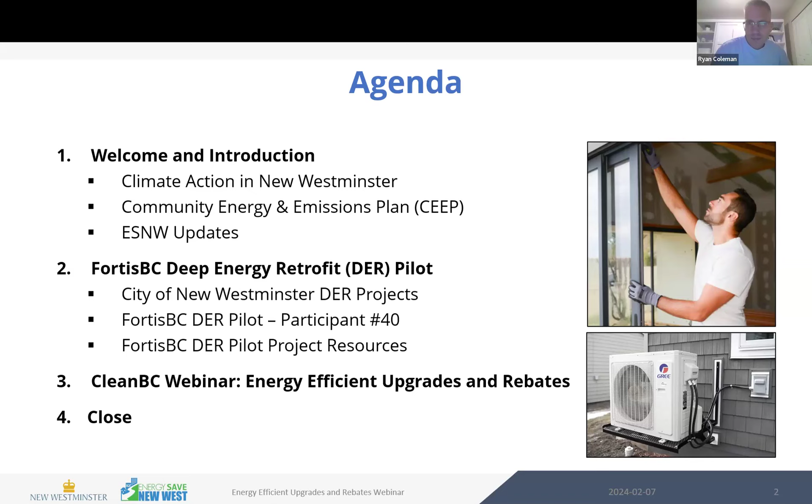I can present, Sue, if you want. Yep, okay, go ahead, go ahead, Leya.

Sure. So as I started getting into during my own introduction, the climate action team was really formed after the city declared the climate emergency in 2019. That climate emergency was the city recognizing our role in the fight against climate change. From that, the city developed the 7 bold steps for climate action.

The goal around that was to make the climate work a little more tangible and relatable to the community. Using these bold steps, if we're able to realize a carbon-free corporation, a car-light community, et cetera, by doing that we will inherently create a much nicer place to live, but also work our way towards a zero carbon future. So it was a more tangible way of understanding the types of things we might do that make up that zero carbon future for our city.

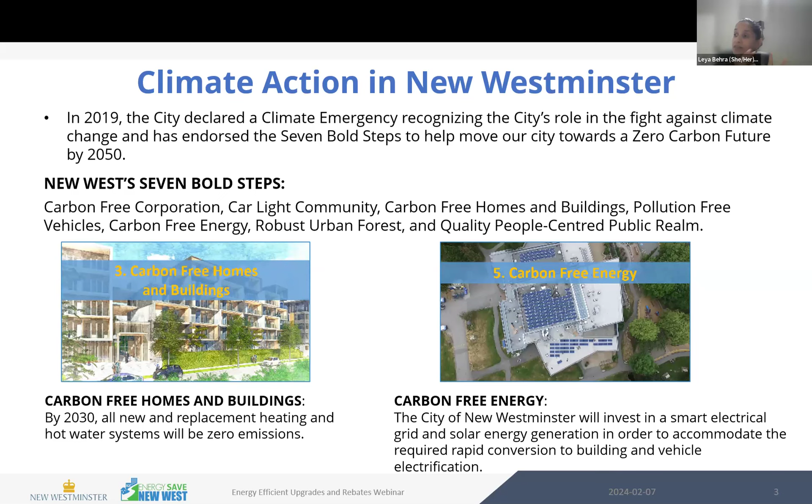What's really relevant in this conversation is bold step number 3, carbon-free homes and buildings. We have a few goals there, including by 2030 that all new and replacement heating and hot water systems are zero emissions. We also recognize the city has an electric utility, which is pretty unique and a great opportunity for us - a place where we can continue to secure and deliver carbon-free energy to the city, upgrading our electrical grids to be smarter, looking at generation opportunities, and requiring rapid conversion to building and vehicle electrification. All of those things we do with our electric utility help enable all the other climate work we're doing.

Another focus that might be of great relevance to our community members sitting with us today is the Community Energy and Emissions Plan. This is a document that outlines the big picture - the types of actions we need to take as a city, both directed by city staff, but also in collaboration with all of our residents, to meet our emission targets.

That plan is available through the city's website, and it's broken out into sections to make it easier to read, covering transportation, buildings, energy, waste and circular economy, and natural systems. It shows how the climate work fits into all aspects of how departments within the city deliver their work, and also how it relates to supporting our community in reaching our zero emissions goals.

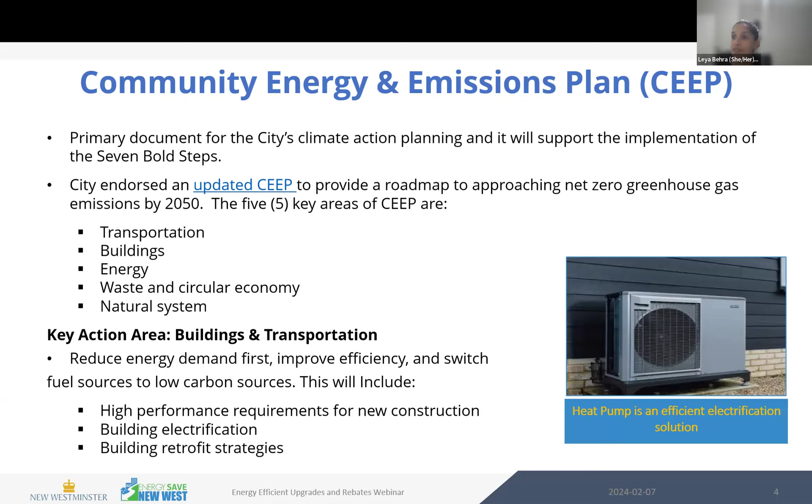Nice. So I think with that, I'll pass it back along to. Perfect. Thank you, Ryan. Thank you, Leya.

So Energy Save New West is really one of the on-the-ground dimensions to the efforts of the city and Leya and her team. We wanted to give a couple quick programmatic updates that we thought would be relevant to today's subject matter and folks doing this type of work in New West.

The first one is around our infographic. We publish it on an annual basis, showing the work we're doing and our results in the field. That is available now as a blog post on our website, and you can download a PDF version.

Second, we've done a couple webinars now, as well as some industry engagement around heat pumps, electrification, and decarbonization. Although that's not the focus of tonight's webinar necessarily, we are coming out with a few new supporting tools, specifically around a noise guide for bylaw compliance and mitigation to manage that. We also have some case studies we've been developing, harnessing some of the learning and sharing from local homeowners, as well as their experience with contractors and the equipment, that we're hoping to publish and make available.

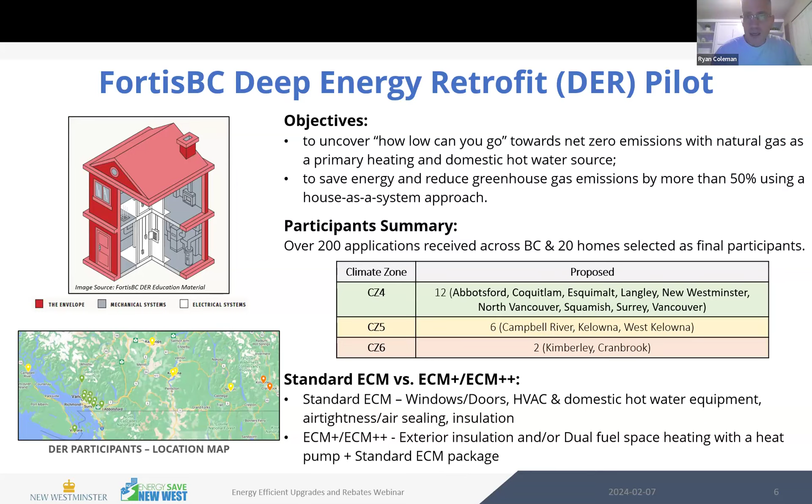Now if you jump to the next slide, this is Jonathan's house. Unfortunately he's not with us, but we do have Bo, and we've got Bo's slide coming in a second. Jonathan has an older 1940s house, about 2,500 to 2,600 square feet. The work needed was a combination of envelope and mechanical systems.

We've done attic and basement insulation upgrades, as well as significant air sealing. All of his windows were replaced and upgraded to triple-glazed high performance windows, along with high performance doors. We also moved from exhaust-only ventilation, which all the houses had, to an HRV system, since we were lowering air tightness and ventilation is a key component. New HRVs were installed in each of these houses, along with a high efficiency furnace upgrade and a tankless hot water system.

I think the key focus we want to draw your attention to is the estimated energy and greenhouse gas emission savings: a 56% energy reduction, from 171 gigajoules to 76 gigajoules, and a 64% reduction in greenhouse gas emissions, from 7.5 tons down to 2.7 tons.

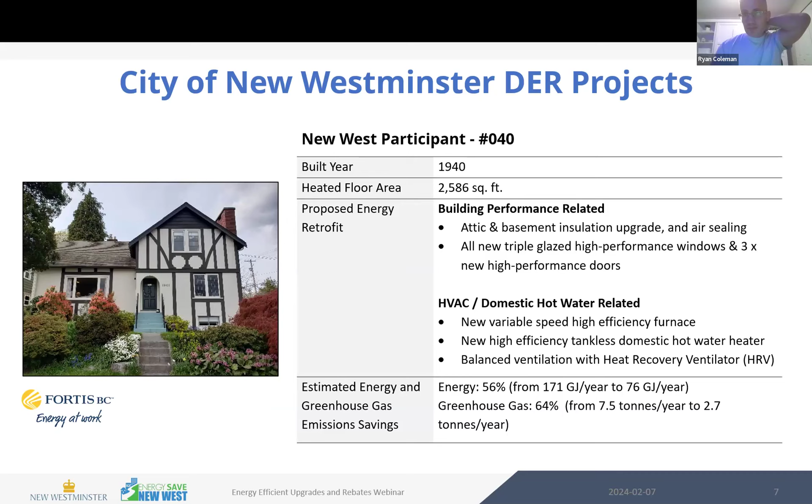And then Bo's house—Bo, if you want to pipe in after I introduce, because we go back to Jonathan's place, feel free. If not, that's totally fine as well. So Bo also lives in New Westminster, and she has a 1964 house, 2,200 square feet.

Again, she had a conventional package, but received all new attic insulation, air sealing, triple glazed windows, high performance doors, and a similar mechanical package with a high efficiency furnace, tankless hot water, and HRV. Similar significance in terms of GHG and GJ reductions of 58 and 69%.

I don't know if you wanted to comment, Bo. I know you've been quite enthusiastic about the work that's been done on your house, which is great—that's where we want to get to.

Yes, I am super excited about what you've done to this house. I just applied because I read it in the Energy Save New West, and I didn't really think I stood a chance of getting this, but I applied, and I'm so glad I did, because the comfort level is beyond my wildest dreams. It was so cold and drafty and moist in here, and the comfort is unbelievable with the triple glazed windows especially, and the insulation is coming along, almost done. Everything's almost done now. And the environmental thing was really important to me. I sit on the district climate action committee, and I felt really bad that I was burning so much in this old house. So what they've been able to do is just absolutely—I'm so incredibly grateful. And it saves me money, it improves my home, the value of my home too. I just can't recommend it enough to anybody. I'm just thrilled to bits.

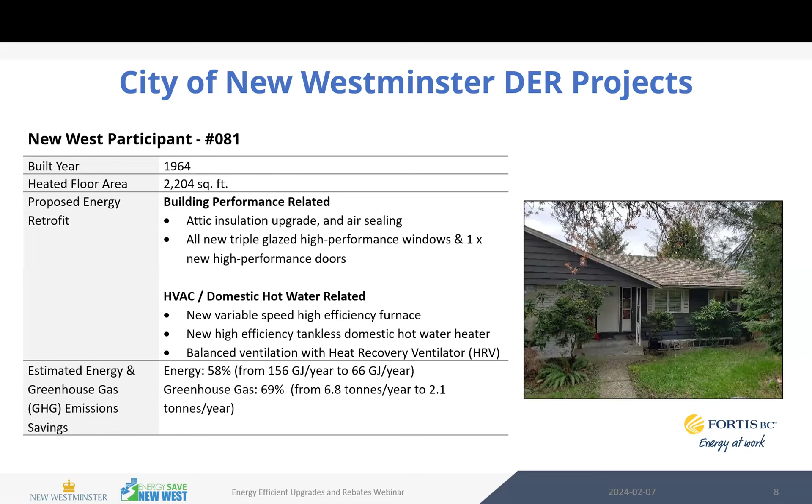Number one, this house is getting significantly more airtight through detailed insulation and air sealing upgrades—going from approximately 10.5 air changes down to 2.5 air changes per hour. All of that was a lot of heat loss. So we're significantly improving the structure and building envelope, which has allowed us to drastically downsize the actual equipment going into the house.

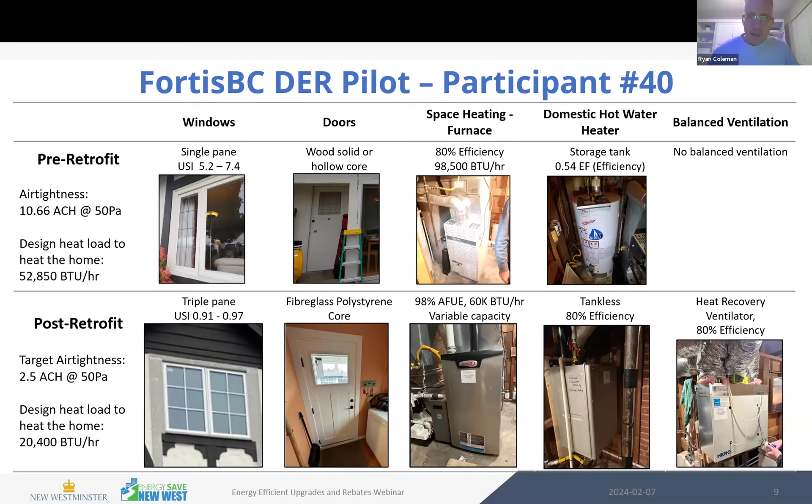But to tie this all up and move towards the Clean BC folks, this is really about that envelope-based approach. When you improve your envelope—insulation, air sealing—ahead of doing your mechanical systems and sequence it properly, you achieve added benefits of smaller equipment, less heat loss in your home, improved comfort, and other benefits like health and indoor air quality, especially when putting in HRVs and balanced ventilation. Yeah, and that's just a before and after picture.

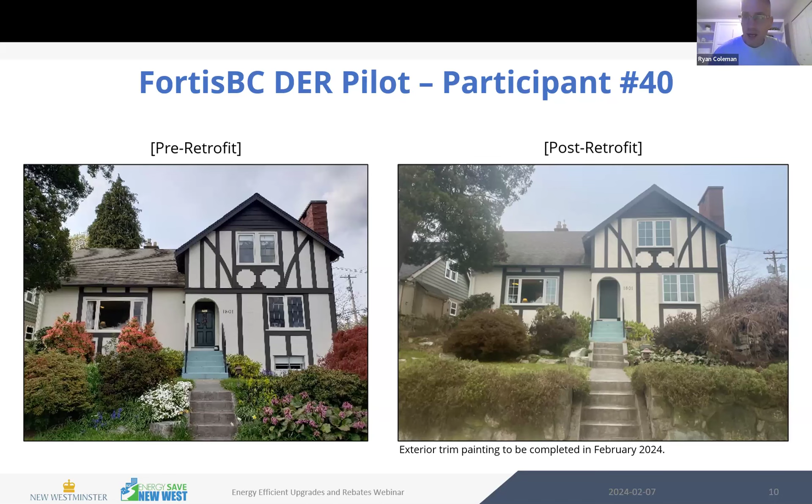As highlighted, some of the finishing is still yet to be done on these houses. They're all due to be fully completed with post-energy evaluations, heading into a year of measurement and verification at the end of March. That's one of the cool things I didn't mention in the pilot beforehand—we're talking about modeled information right now, but embedded in this project is a year of measurement and verification to see how these houses actually perform when occupied and run under regular operating conditions with the actual occupants. It'll be great to see those results shared over the next year. But they're all getting a year of measurement and verification.

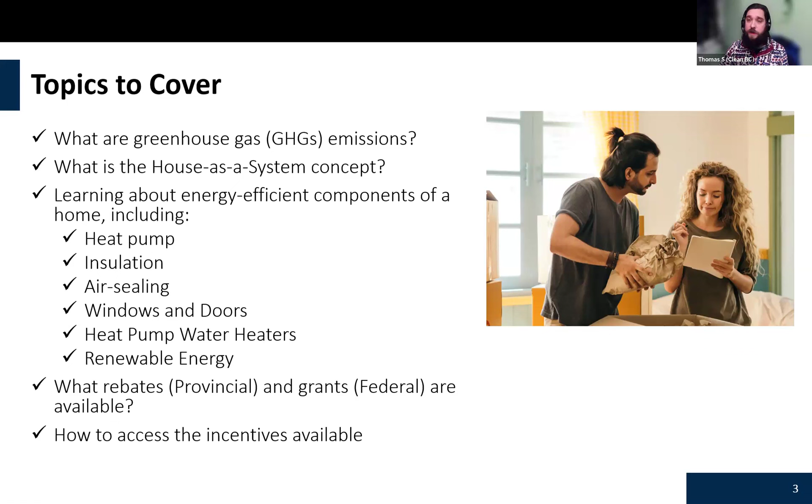First, I want to overview what greenhouse gases are, because they're typically thrown around a lot. Greenhouse gases are made up of many different types of gases: carbon dioxide, methane, nitrous oxide. Typically we're mostly concerned with CO2 and methane as the main things we deal with.

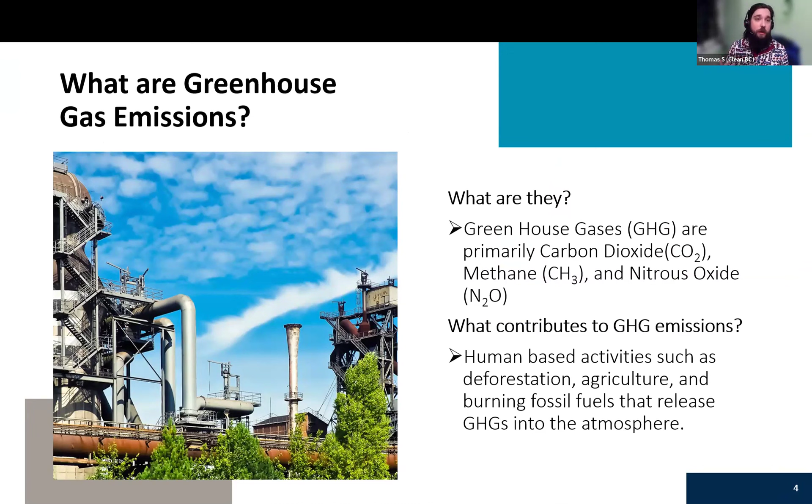What typically contributes to these GHG emissions is an encompassing thing - human-based activities, deforestation, agriculture, burning fossil fuels - those all release GHGs into our atmosphere and modify and change it as it goes. Our homes are definitely one of the major things we need to be concerned about, and the emission sources that we use.

Higher efficiency furnaces and high efficiency heat pumps are always going to be beneficial at reducing the overall amount of emissions you're giving off, and having that upgraded house. Houses heated by gas produce about 50 GHG on average - that's about 2 barbecue propane tanks if you want to put it into perspective. Metro Vancouver typically has the highest amount of GHG burning, but most other communities are typically similar, with natural gas being their main source of heating.

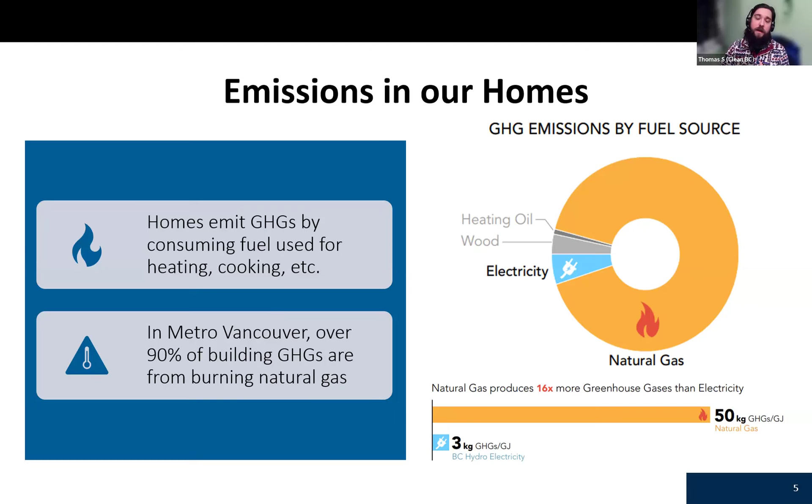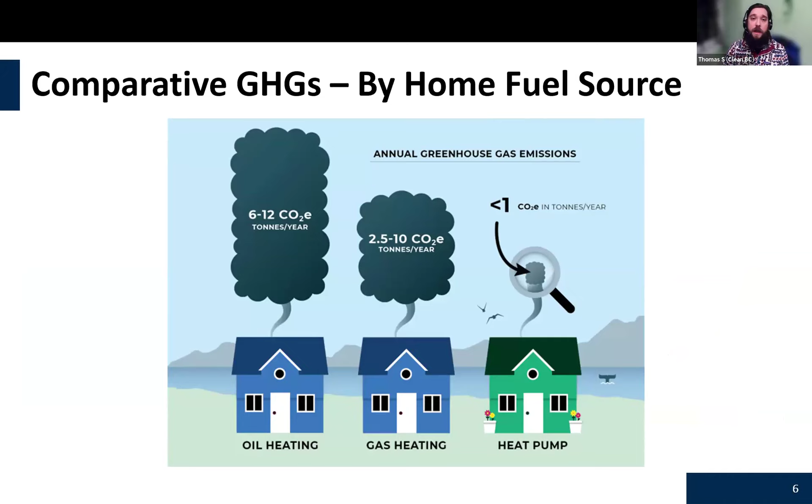This photo references the different amounts of GHG across all the different types, with oil heating being the worst, but we typically don't see that as prevalent over here on the West Coast. As you can see, heat pumps do produce some GHG, but they're typically very minimal and don't produce as much as you'd think.

Overall, I want to also note that BC has 98% of its electricity generated by hydropower. We generate about 702 megawatts of wind power and about 303 megawatts of solar power, so it accounts for a lot of our overall clean energy that we perform.

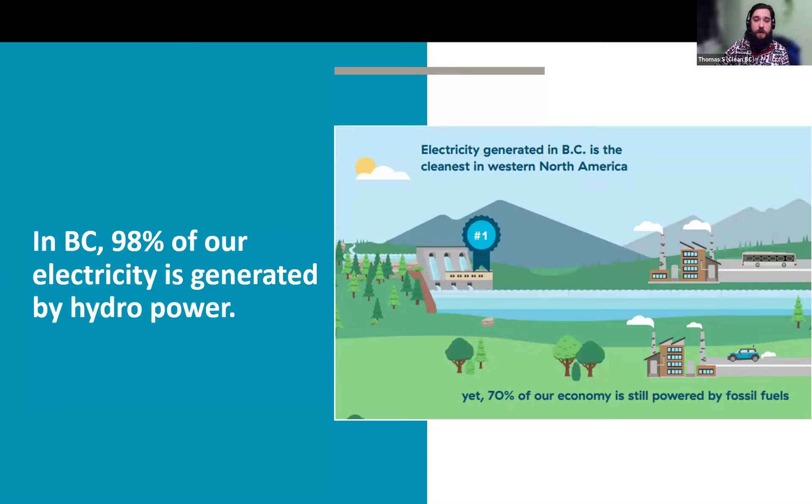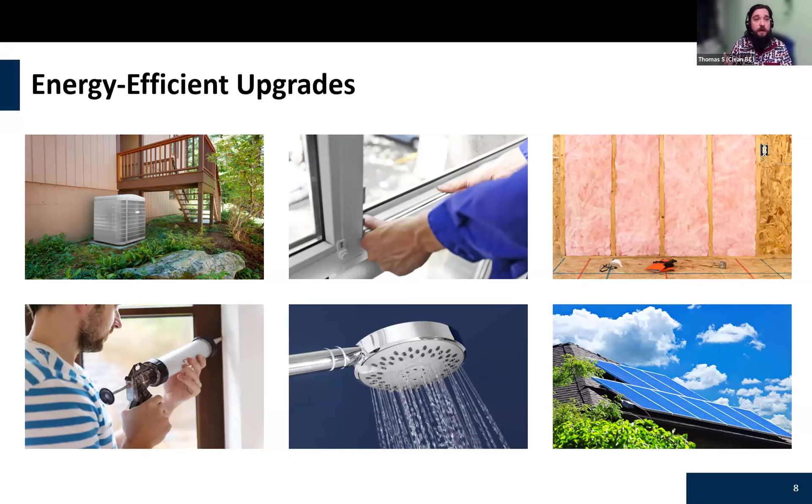Before we get there, Ryan has already talked about this, but this is the house-as-a-system concept - looking at the house as a whole. Everything you approach has an effect in the end. So if you add more insulation and air sealing, you definitely have to watch out for your ventilation. Those are some examples of what we're looking to talk about.

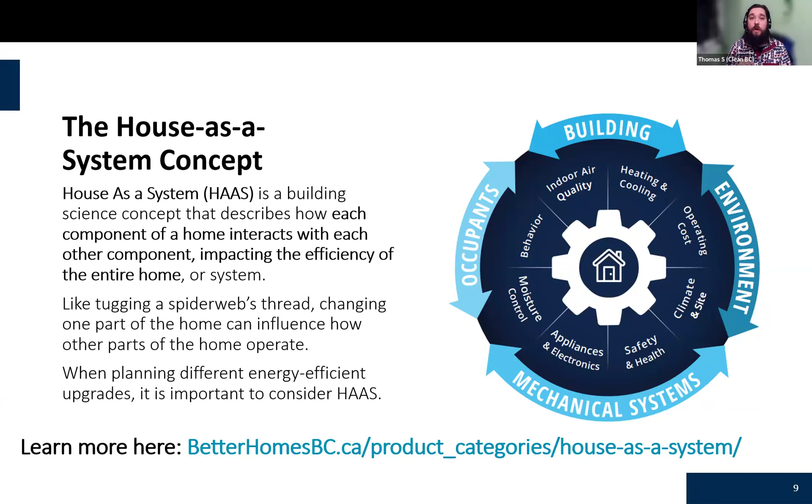Each item has a spider web and has a connection that we have to always think about. Some examples we're going to talk about are air leakage issues. If you seal them up too much, you also need to move some of that air and moisture outside.

So things like your heat pump, our different types of HRVs that we have seen, those will be effective ways at removing those kind of stale and dirty airs. What are the benefits? You'll be able to have a smaller size system, as we have stated before, more efficient heating and cooling, and then also your temperatures inside of your house will stay more consistent, as Bo has actually noted there.

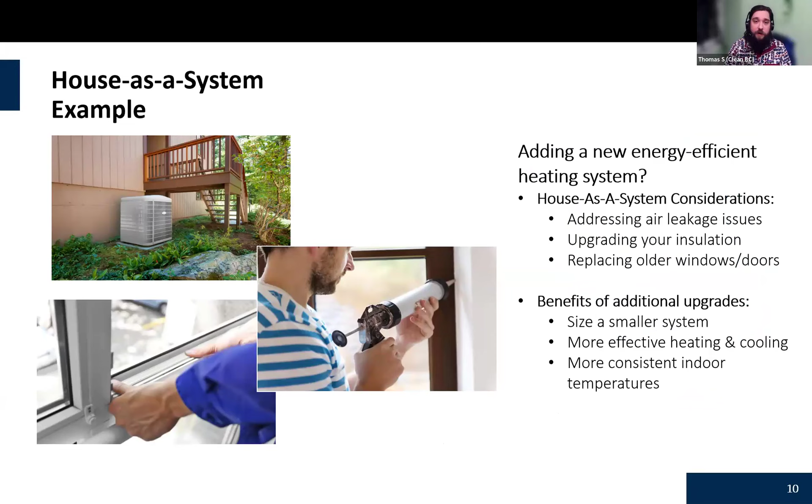Home evaluations are something that are very beneficial and very helpful for you to understand what upgrades are going to be needed for your house. They are comprehensive, unbiased. The energy advisor will always give you what is real in your house, what is going on, and what you need to do to take your next steps.

It will always help you find the solutions that you want to do for your house, making sure that you got the best options for yourself as well, and then guide you as much as they can towards different rebates and grants.

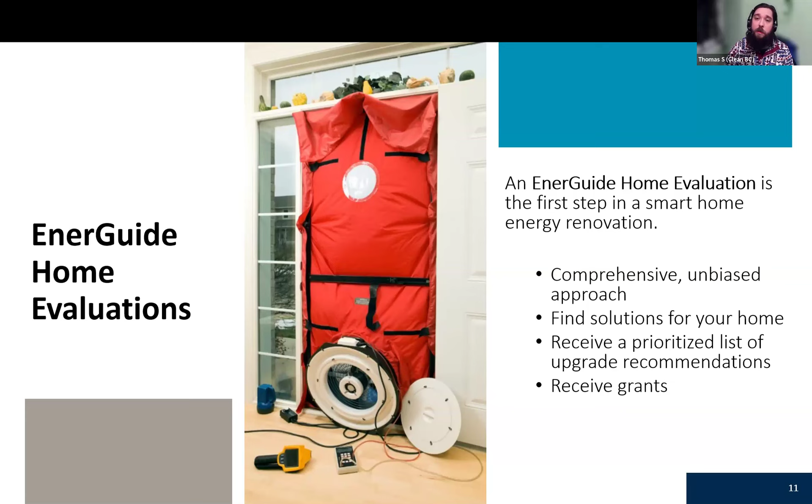All should typically complete a blower door test. In some conditions, there are reasons that they do not complete it, for health reasons, but it is typically needed to always do a blower door test when they do these evaluations.

We are going to brush over two key incentive programs. First will be the provincial system, which will be through Clean BC. That will be typically about over $13,000 in rebates in total. You have municipal top-up programs and regional programs such as Energy Save New West that will have the ability to offer different programs that will be able to help you as well. The other one is going to be the federal program, which is the $5,000 grant, the $40,000 interest-free loan for 10 years, and then the $10,000 oil to heat pump affordability program.

First, I will just quickly go over the income qualified programs and the different Clean BC programs that they have. Clean BC has, like I said, over $13,000 — it's about $14,500 total — that is how much they have available for rebates that you can get to your house. They also have the income qualified program, so if you are of lower income, you can access grants and things like that at a higher amount of money given back as a rebate. They also have a low interest finance program and different types of new construction programs as well.

The Greener Homes Initiative is a little bit different. For most of the program, you need to get an energy evaluation to take part in any part of the program, except for the oil to heat pump affordability program. You do not need an EnerGuide evaluation for that one, you just need to apply on the site for the application.

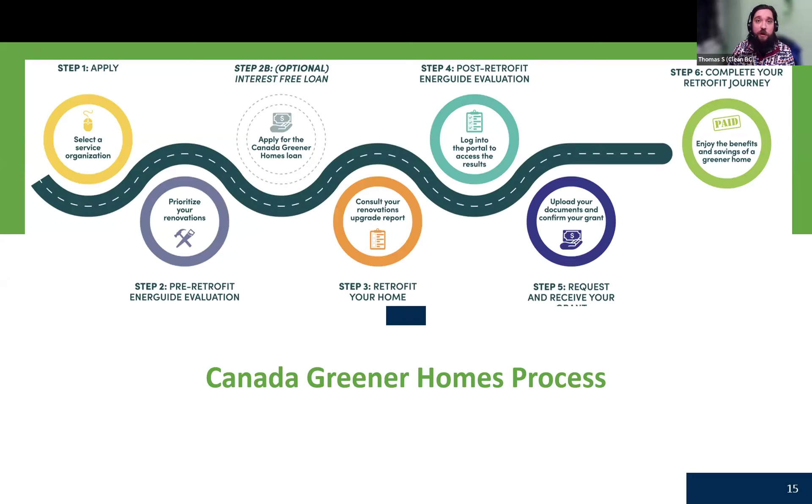This is the general process of the Canada Greener Homes Grant process and also the loan process as well. Both will follow very similar processes: you need to get an EnerGuide evaluation, get that report, typically check what upgrades are best for your house, and talk to your energy advisor if you have questions. Then apply those upgrades, apply for the loan beforehand if you are going to do that, and move towards doing all those retrofits, finishing off the application and getting your post-retrofit evaluation. After you're done all of those items, you could always ask the Canada Greener Homes Grant Program for any extra help along that process.

Next, we will be talking about the different types of upgrades in your house, what those are and what those entail, and give you ideas of what to do.

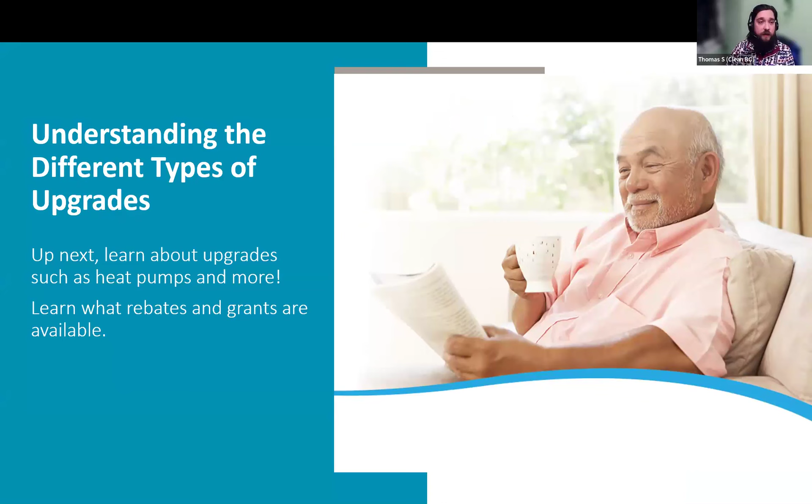First, I want to talk about the heat pump itself. Heat pumps are always talked about, and getting an idea of what they do is a very big first step. Heat pumps use electricity to heat through your house. They do this by transferring the heat from the outside to the inside via coolants in the refrigerant lines. They are typically about 3 to 4 times more efficient than most energy electric-based heating systems, and are very good for your house and overall reducing energy usage.

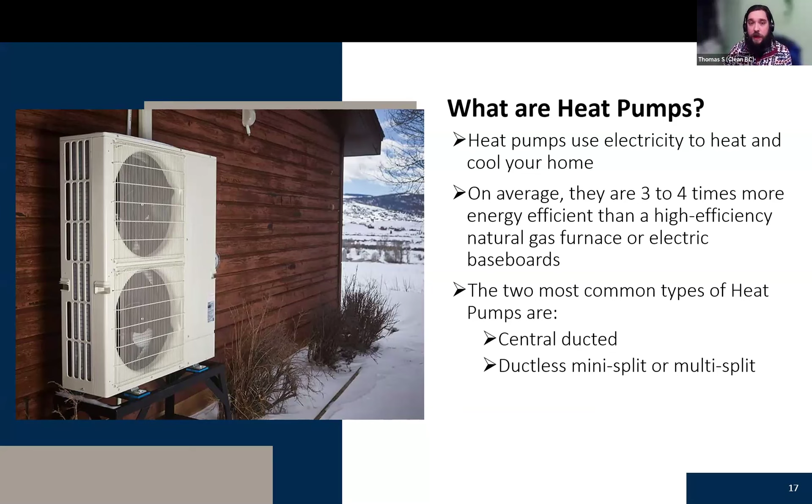There are typically two common types that we always reference here: central ducted, and ductless. There are other uncommon types that are not typically installed, but they're air-to-water heat pumps and geothermal as well.

Central ducted heat pumps typically use your old connected vents that you have in your house. Always keep in mind, you want to check with your HVAC contractor. If you need to upgrade that vent or ducting, make sure they know about it beforehand, including any extra costs associated with that. This will provide cooling and heating for your whole house as normal as you would typically have in a central ducted system, so you won't get much of a difference, but you will get higher efficiency overall.

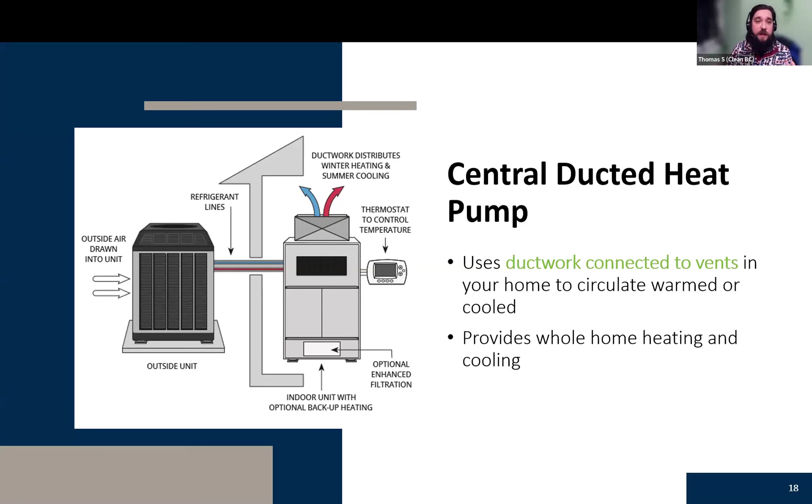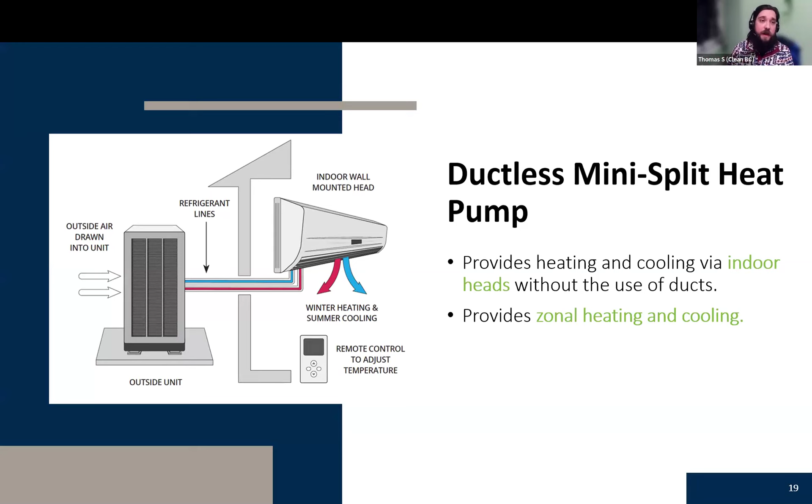The next type we typically talk about is the ductless mini split system. That system typically has indoor heads, as you see on the screen there. That head is more able to give you zonal heating and cooling in the house, and has a bit more control on each unit itself. All the refrigerant lines are typically done through little pipes that look like water pipes almost. That is better for people who don't have ducting in their house.

Benefits of having a heat pump: I'd say maximizing overall efficiency. They're 3 to 4 times more efficient than most electrical systems, so that's always something to be mindful of. They're cost effective, as they have relatively higher efficiency, and reduce overall cost as well. They're climate friendly too, with very low CO2 emissions as we stated earlier, giving the environment a greener future. It's also a good thing that it improves your indoor air quality, as it typically filters out pollutants and provides a bit of dehumidifying from your heat pump as well.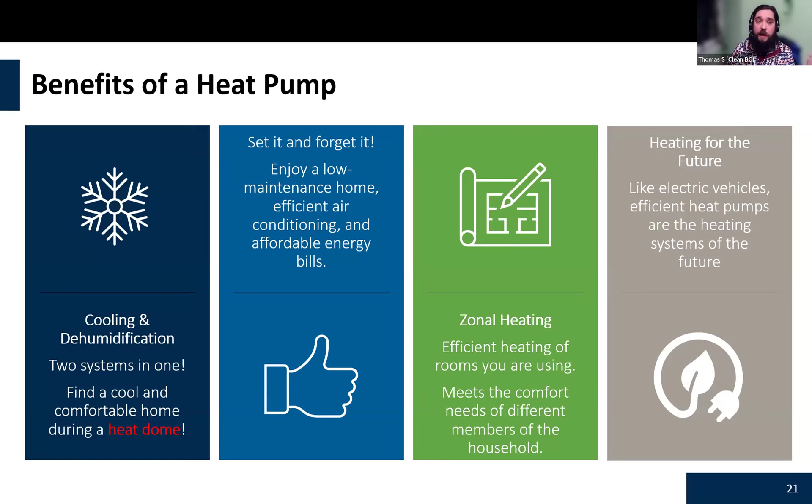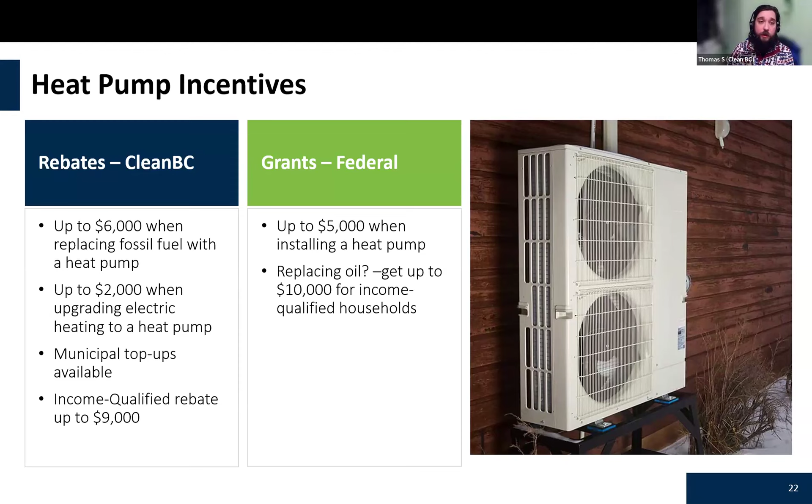These are the different types of grants and rebates available for heat pumps right now. The Clean BC rebates give you about $6,000 for replacing your fossil fuel system, about $2,000 when replacing electric heating, and there are various municipal top-ups you'd need to check your local programs for. Income qualified applicants get a bit more, about $9,000 for those upgrades. One thing to think of: installing a heat pump through the federal system gets you about $5,000. If you have an old oil system, there's also an affordability program for income qualified houses.

A couple of terms before we go with heat pumps that you'll hear a lot in quotes and such - knowing what they are is definitely beneficial. First is HSPF, the heating seasonal performance factor. That measures how well the heating system actually works - the higher the number, the better it is. Typically most programs require an HSPF of 10 or more. The other factor is SEER, the seasonal energy efficiency rating, which covers the overall cooling benefits from heat pumps. That typically has to be over about 16 for most programs. Always check with those as well.

Next, we're going to be talking about insulation. Insulation is an item that basically helps you reduce the amount of heat transfer from the inside to the outside and vice versa. All it is basically doing is filling a gap that is in between your walls.

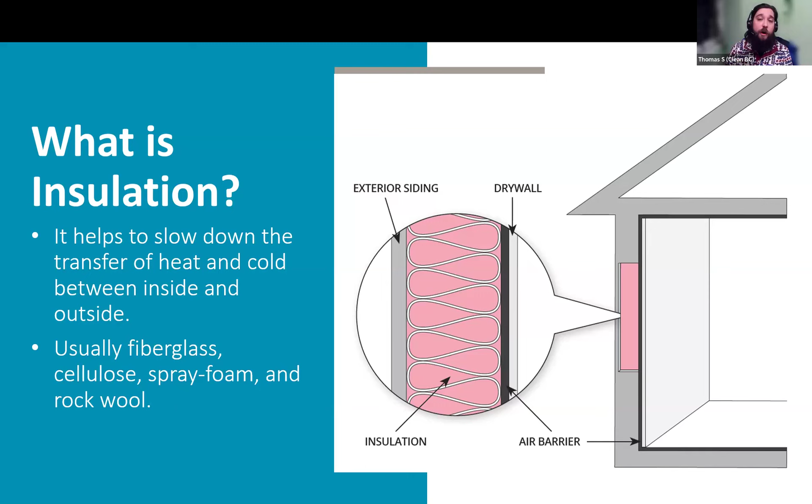That photo is showing a fiberglass batt in the exterior of your wall, and how the wall should be laid out. You have an exterior wall, insulation, an air barrier, which we'll talk about later, and then drywall at the end, typically. The common products for these are cellulose, spray foam, loose fill, rock wool, just to name a few.

Benefits of insulation: overall better retention of your hot and cold air in the house depending on the season. Improved house comfort for indoor temperatures, you'll have more consistency, which will be a common theme. Reduction of GHG as well, since you don't need as much heating for your house because your heating system doesn't have to rely on keeping the temperature higher or keeping it the same for as long.

Quieter comfort - basically you're stuffing your house around the outside with a bunch of insulation, which is also going to reduce the amount of vibration and outdoor noise coming into your house. If you live in a bustling city, that's always something to be concerned about. You're also going to reduce overall maintenance and cost, as it reduces moisture and mildew and things like that which are detrimental and cause more problems to happen. That's always something to consistently think about.

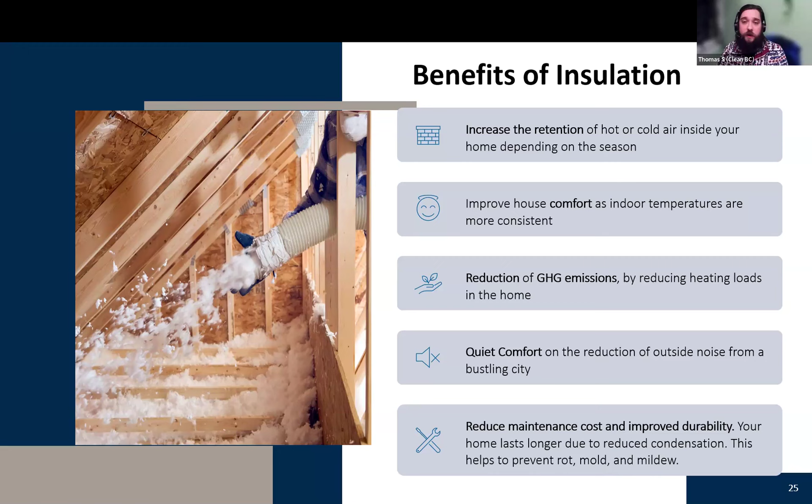You do need to replace it every so often, so being cautious of it, or checking up on it, or having someone come in to check on it is always a good thing to do, as your energy evaluation would do that as well.

Insulation incentives - these are the couple that are available to you. They're typically broken up based on location: attic insulation, basement insulation, exterior walls, and exterior wall sheathing. Don't be afraid to call the Clean BC line to get more clarification on what each one means, but your insulation contractor should also know exactly what it's going to go towards.

The federal grant right now has a total max of 5,000 for the same thing. They're broken up into categories, a bit more simplified: attic insulation, crawl space, basement, and exterior walls. You can also place these onto your loan as well, so that's always something to keep in mind.

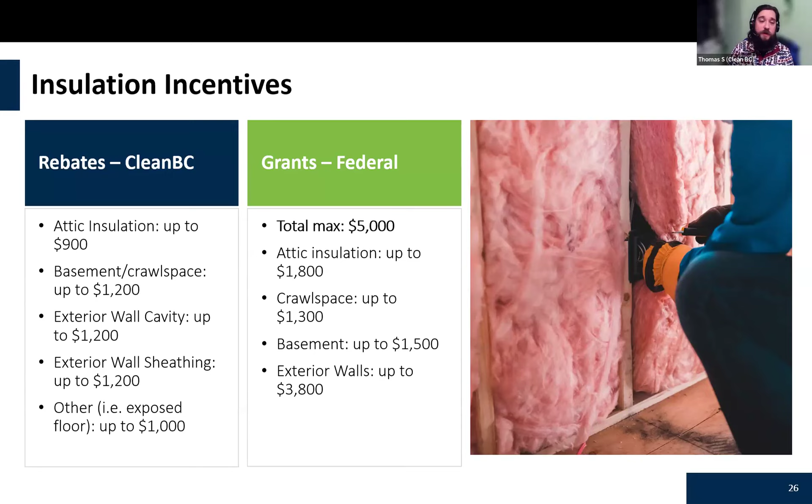With insulation, I want to quickly go over some key words or phrases that will typically come up as you go into a Home Depot and things like that. They'll ask what you need for an R value - these are very common terms used. An R value is the amount of thermal potential, or the amount of heat that can get through that item. The higher the R value, the better or more insulating that thing is, so that's something to watch out for.

RSI is just another version of that value - they're kind of interchanged, but typically you'll only see the R value on typical products. Always look at Better Homes BC to answer any questions about that as well.

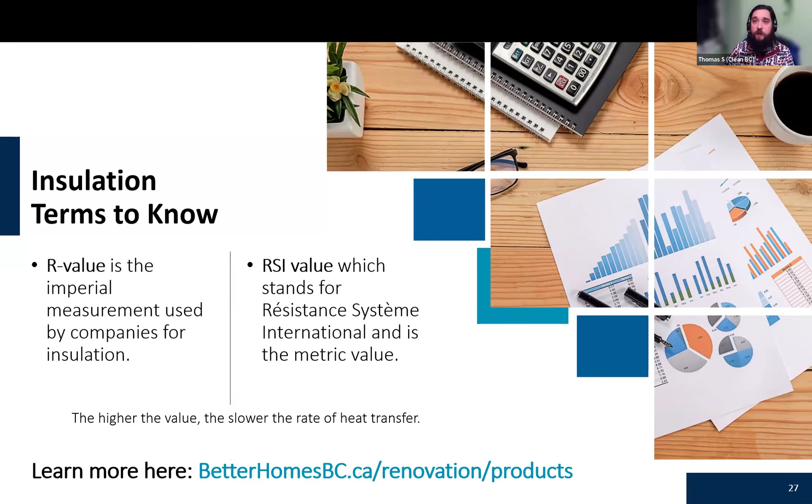Next, air sealing - as we were just talking about, that's the main thing. Air sealing reduces the amount of air and moisture leaking into your house from outside. What it's essentially doing is controlling the uncontrolled air. You want to make sure your heating and air systems are controlling and filtering your air your way, not the outside doing it for you. That's what you're typically trying to do with air sealing.

It can be done with many things, typically caulking and weather stripping, and that always needs to be done every couple of years, making sure it's effectively exposed to the outdoor world. For things like external doors, you want to make sure you're always checking those, making sure they're not cracking or anything like that. The top of your windows is also always a typical miss spot, so those are good things to always think of.

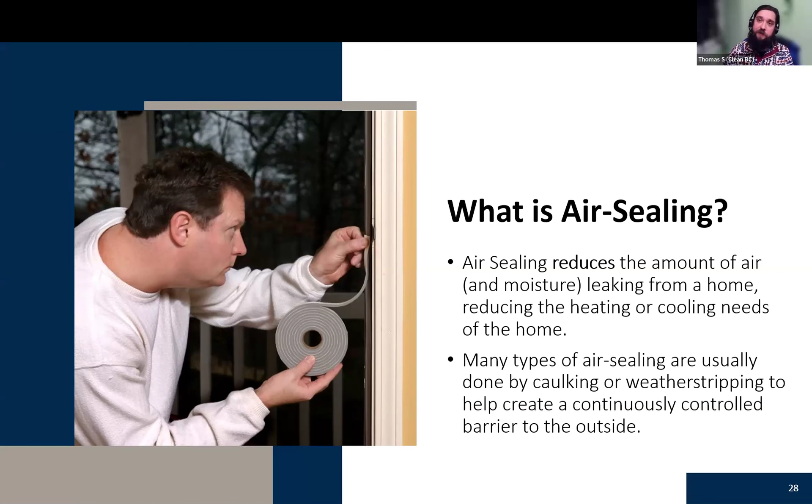Benefits of air sealing that I've already been stating: improved efficiency of the house. Overall, you're going to reduce the amount of heat needed for the system to run, so you won't have to put more reliance on your heating system. Overall improved air quality, as uncontrolled air is not coming into your house and you are now controlling it with your heat system and your air systems.

You can now have your own air being filtered properly, as some people typically have allergies or are allergic to pollutants. Those are good things to think about. Increased comfort as well, as you get better air quality, it's comfortable in that moment. So it's always good to have that, and the ability to have temperature fluctuations stay the same is always amazing too.

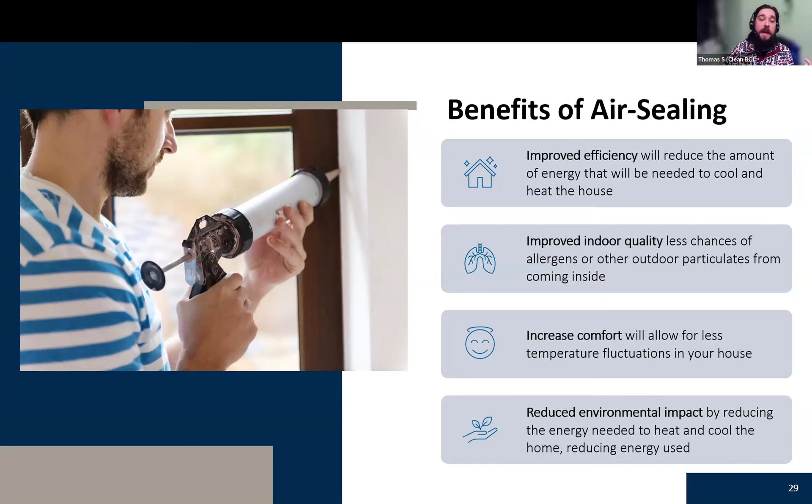You will also always be reducing your environmental impacts, as you'll be reducing the amount of energy you're using for the heating system, and making sure your house is sealed all the way around.

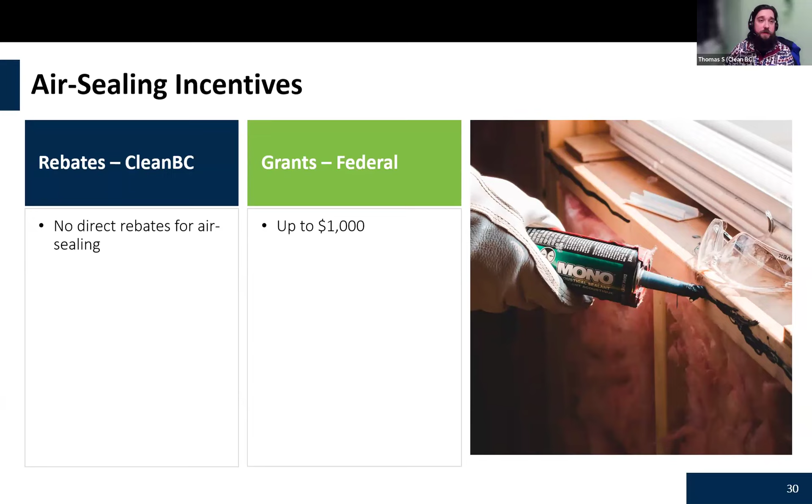These are the incentives as of right now. CleanBC does not have any as of right now. Typically these are done by yourself, as I said earlier - caulking, weather stripping. There are always classes about them too, and your Home Depot can always give you a little bit of guidance as well. But the federal program does still have a $1,000 rebate for that.

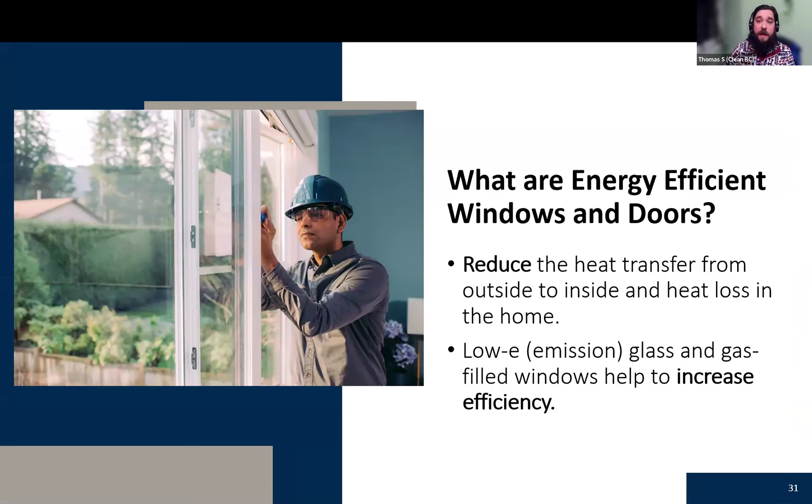Energy efficient windows and doors - what are they? They reduce the amount of heat transfer from outside to inside your house. All it's going to do is have typically a lower emission glass or double pane glass. Those are the typical common words you'll hear, and that's what you're trying to look for in your windows. The higher the amount of panes, the better the efficiency of the window.

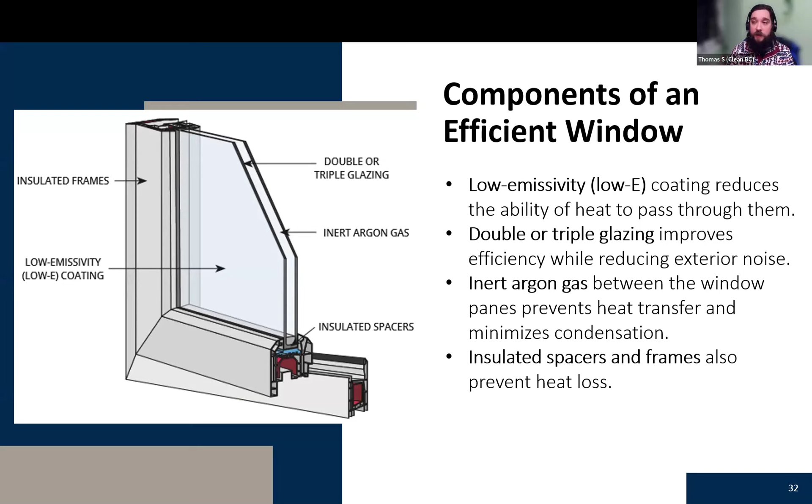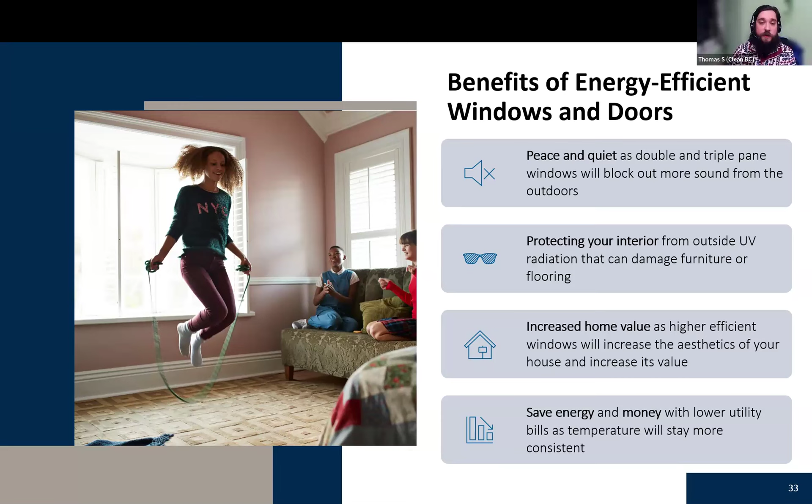Increased home value - it looks really nice to have new windows on there, as they're very efficient and improve the aesthetic as well. And you're also always going to save money - everything here is going to save you a little bit of extra money. Those windows are a big thing, as they're typically the last thing people upgrade, or they leave it to the last bit and it's not as great. So always looking at windows as an upgrade option is a good thing too.

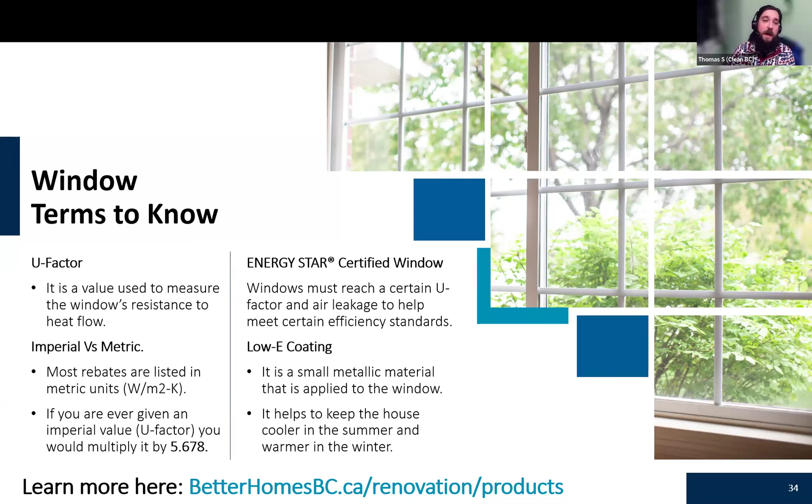Most window installations also have to be done with Canadian certifications. Energy Star is the most common certification, but there are different certifications that can be accepted. It's best to look on the CleanBC site or the federal site as well.

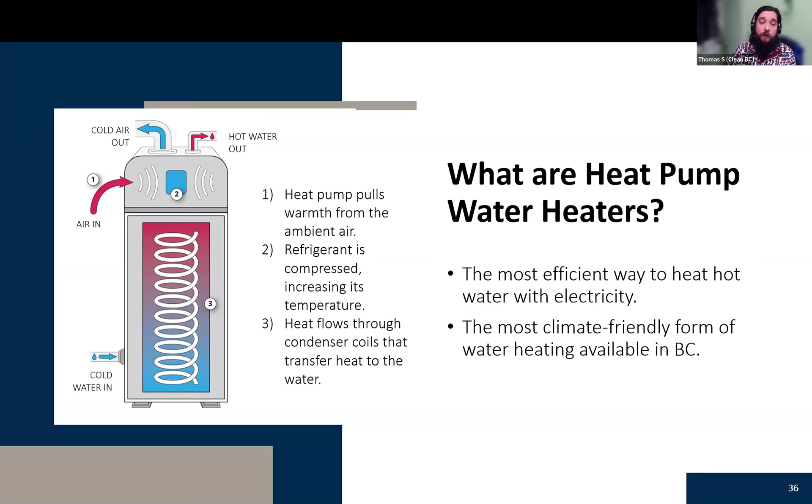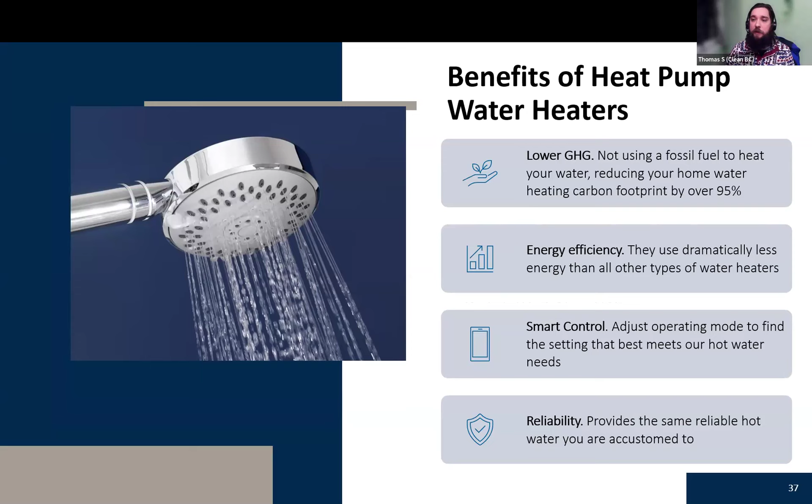Heat pump water heaters will be one of the last couple items we'll talk about. They're very similar to a heat pump, pulling air from outside and transferring the heat inside, then heating your water via a coil. They're very efficient, work well, and are climate friendly and easy to operate. Their efficiency is pretty good, with decent reliability. They decrease your overall GHG and have smart controls on most models now, as they're a fairly new item being built into systems and houses.

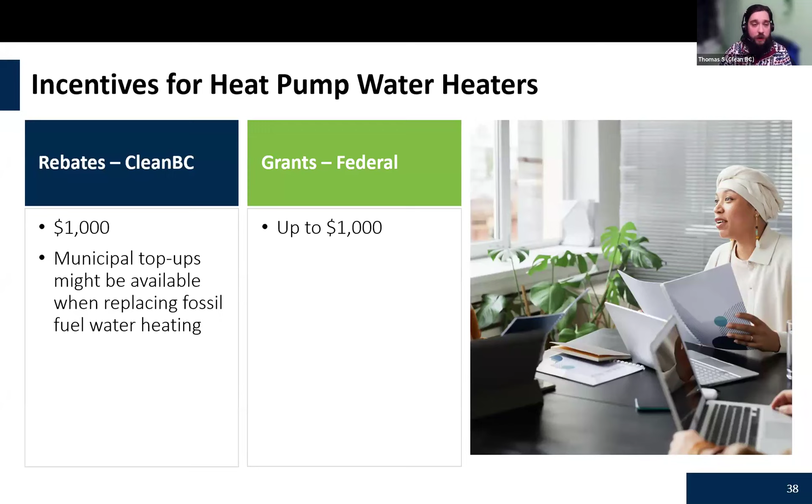The last item I'll go over is solar renewable energy, and give you an idea of what you can do. Solar renewable energy is something we harness from the sun. It's very easy and reliable, getting cheaper as we go on through the years, and is typically better for your house, offering many benefits in reducing dependency on the grid and things like that.

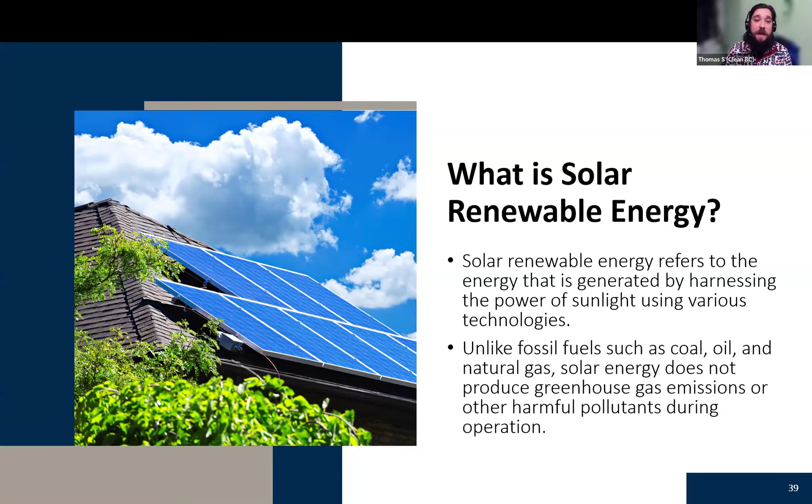Overall, it's going to save you a lot of money and increase your home value, as you won't have to rely on the grid. With things like power outages, you'll typically be able to walk away from those. Overall, you'll be saving money throughout the year.

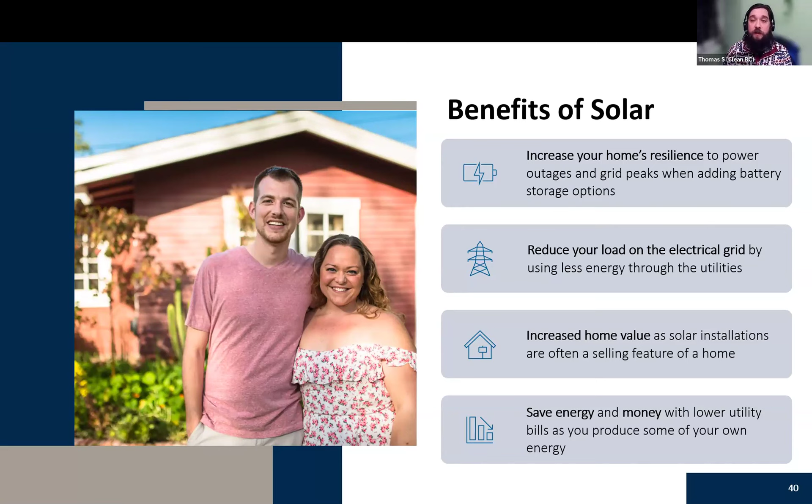The one program I'll highlight in the solar world is the BC Hydro net metering program. What typically happens is if you have excess energy that you're making, you send it to the grid. They give you a credit-based system, providing credits back for any times you need electricity from them, and vice versa. That's something to always keep in mind - it's part of BC Hydro's CleanBC.

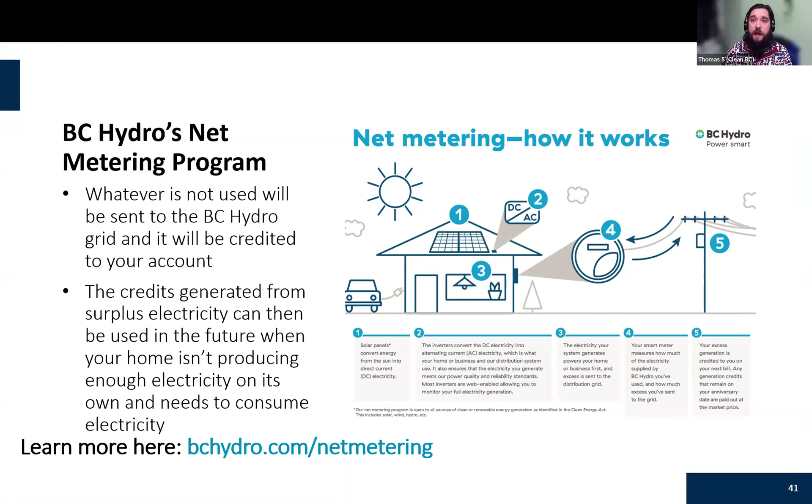Incentives with solar - there are none right now for CleanBC. Overall there are some grants in the federal system: $5,000 for solar panels and $1,000 for a connected battery, but you only get a max of $5,000, so keep that in mind. It's also very common for people to use the loan for solar through the federal system - it's 0% interest over 10 years for that $40,000 loan.

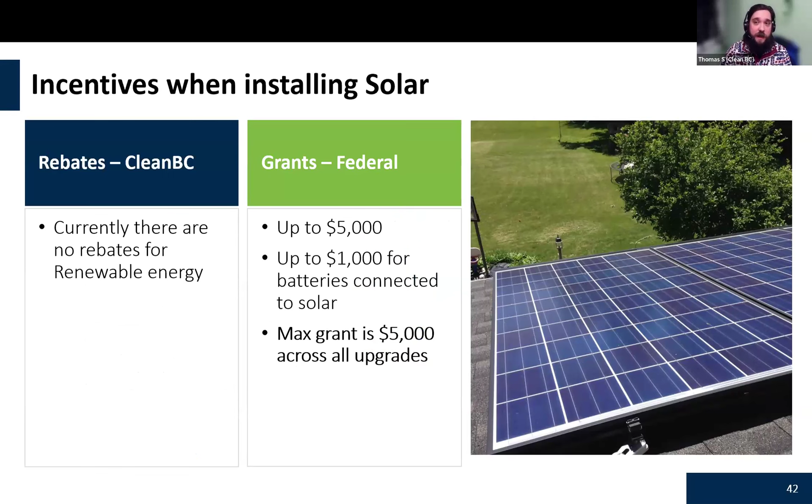This will bring up your overall steps. You'll pick your type of project - are you renovating a home, building a home? Where are you located? For example, Energy Save New West - so if you're in New Westminster, they can pick local programs and slot those in, or any top-ups you might have. And then also, how is your home heated? So they can show you the proper items for yourself as well.

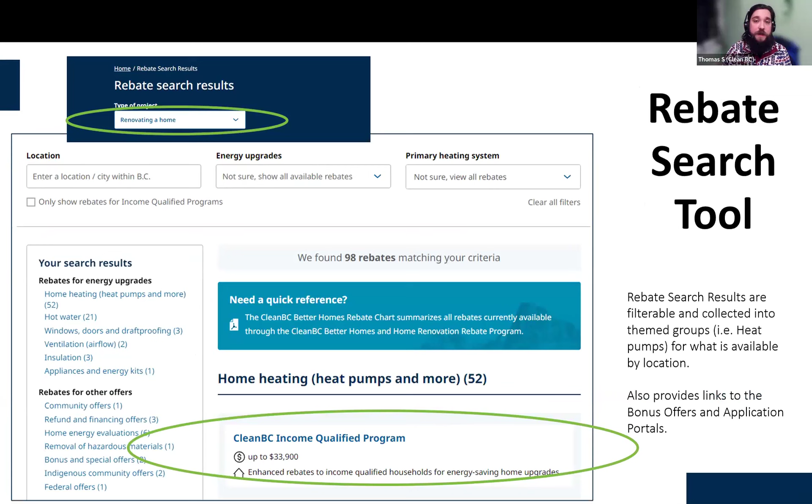Once you've gone through that, you will look like this kind of photo here. You'll be given a plethora of different options and items to look through. They will give you different types of quick reads that you can click on, which will tell you a lot more about the information of how to apply, what to do, how to go about it, and any things you need to keep in mind.

I always implore people to look at the FAQs, as they have a lot of information on what you need to ask, installation questions, windows questions, things like that, or where you need to go for your next steps, or even guide you towards your next steps. It is definitely a good resource to use.

Next, we'll quickly go through how to access the different grants and rebates, what you need to do about them, and the different steps that you need to go through.

Just want to highlight again the two stackable programs. You've got the province program, which will be up to about $13,000 in rebates total. And then you also have the municipal top-ups and also your regional programs that you want to check out. Federally, you have the $5,000 grant, the $40,000 loan for 10 years at 0 interest, and the $10,000 oil-to-heat-pump affordability program.

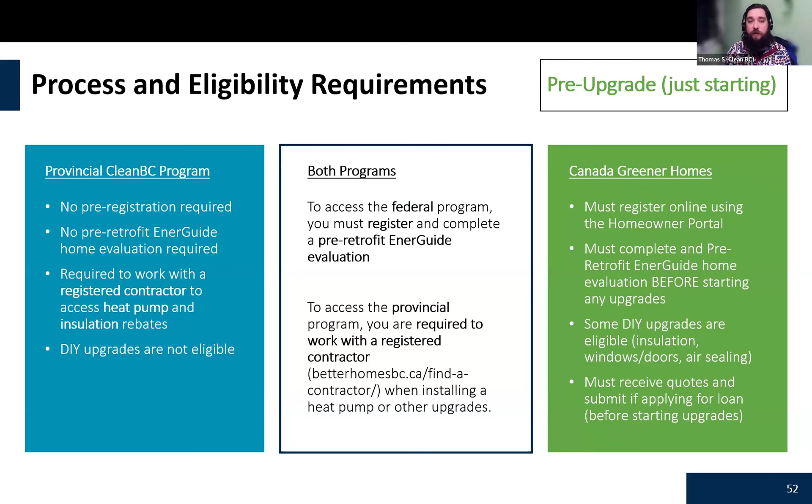That will typically be for that. The federal program for the loan and grants, you need to complete all your upgrades, and then book a post-retrofit, which is another blower door test. The gentleman comes in and does that, and they also check what upgrades you've got done. Then you'll do the applying after that, uploading some invoices and things like that. They will upload their report, and that gets sent off to the federal government to check and be able to get your grant money.

Key reminders I want to go over here: each upgrade has specific requirements, so always check online before completing the work. Provincial and federal requirements differ a little bit here and there, so keep that in mind and make sure you check those before starting any upgrades. Check eligible product lists and things like that, and don't be afraid to ask the CleanBC Energy Coach service where those are or how to get toward those.